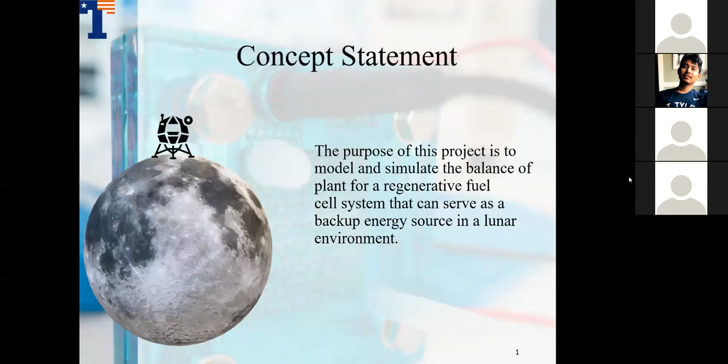NASA has continuously looked for ways to develop an effective power generation system that can provide sustainable energy to meet its challenging environmental conditions in lunar space. One device that NASA has implemented is the fuel cell. Unlike batteries, which run out over usage, a fuel cell produces clean, hazard-free, constant power. It produces electricity through an electrochemical process between hydrogen fuel and oxygen to produce water and heat as a byproduct.

Theoretically, the efficiency of the fuel cell is 83%, while the power needed for one lunar cycle is 100 watts. The design is a self-contained unit that can be transported to the lunar space, where it can be powered on by a photovoltaic cell during lunar day. Since the project is meant for lunar exploration, our design was modeled under Earth-based conditions. By doing this, we were able to replicate the design by using simulation to show performance of the whole system through the in-lab testing of the anode side to generate a power of 100 watts. Next.

This animation shows how hydrogen flows into the fuel cell through the anode side and oxygen through the cathode side. The hydrogen ions flow across the membrane towards the cathode, while the electrons flow through an external circuit, do work, and return back into the fuel cell. The oxygen from the cathode recombines with the incoming electrons and hydrogen ions to produce water and heat as a byproduct. Next.

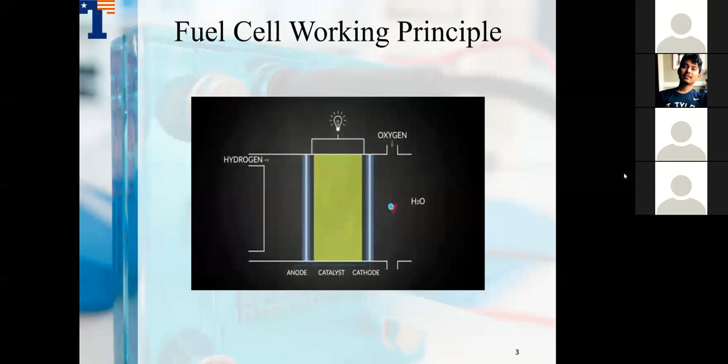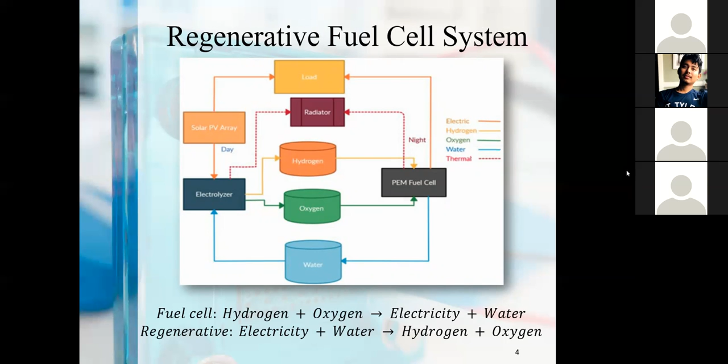It is regenerative because the electricity produced uses water from the fuel cell to produce oxygen and hydrogen by way of the electrolyzer, which is then recycled back into the fuel cell for continuous flow of power. Next. Here are our project objectives.

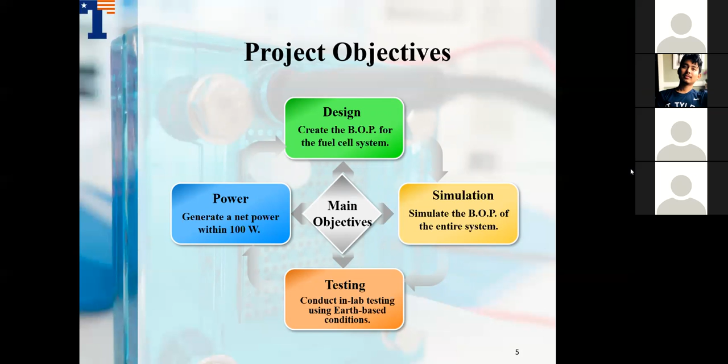Last semester, we focused on design, which is to create the balance of plant for the fuel cell system. This semester, we focus on the simulation and testing. Simulation of the operation of the balance of plant to see the relationship between various components. And the testing, to build and test an anode side using Earth-based conditions to give a physical representation of the system. And the last objective is the power, to deliver a net power within 100 watts, as the value was set forth as a requirement for the project.

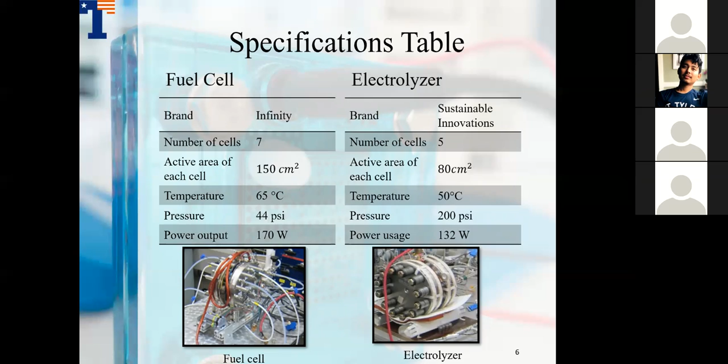Here we have the specification table. The simulation models were using the fuel cell and the electrolyzer from these two brands, which are Infinity and Sustainable Innovations. For the fuel cell, it had 7 cells with an active area of 150 centimeters square. For the electrolyzer, the number of cells was 5 with an active area of 80 centimeters square. Simulation enables experimentation on a valid digital representation of a system. The simulations are key to see if the values are reasonable and acceptable for the project.

This is our Simulink design schematic. At number 1 is a PEM fuel cell, which will convert the chemical energy of hydrogen and oxygen into electricity through chemical reaction. Number 2 shows the electrolyzer, which breaks down water into hydrogen and oxygen. Number 3 shows the hydrogen and oxygen entering the fuel cell through the anode side and cathode side respectively. And number 4 is a water storage tank, which holds the fuel cell byproduct, which is water.

And for the thermal fluid management, we have a cooling line, which will use DI water, heat exchangers, and dehumidifiers. And there's also supporting components such as pumps and compressors. The Simulink modeling and simulation the team conducted will focus mainly on the fuel cell, electrolyzer, storage tanks, pumps, and compressors. Next.

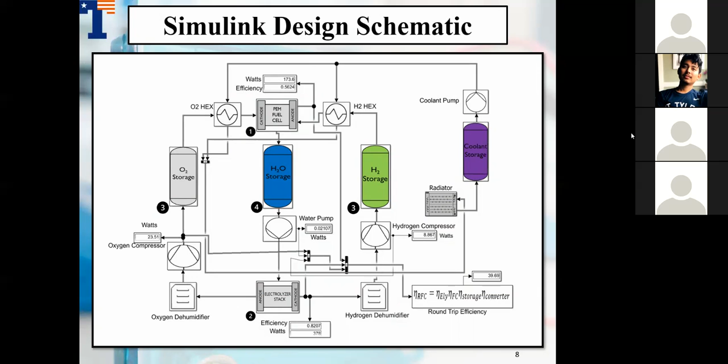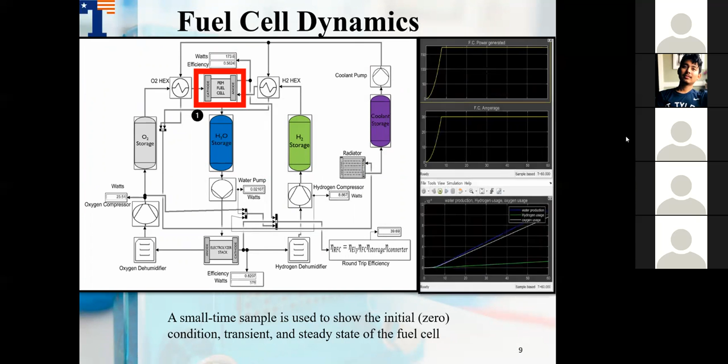Our model was based on a 24-hour cycle with the fuel cell operating for the first 12 hours. A small time sample is simulated to show the zero initial condition, transient, and steady state of the fuel cell. The fuel cell subsystem was modeled with the current being the input and the mass flow rates of the gases and water being the outputs. Next.

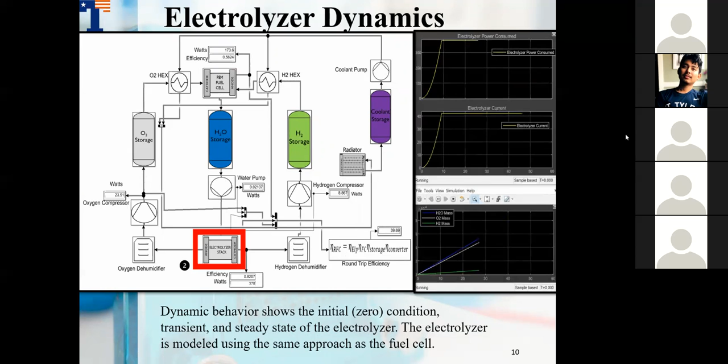For the last 12 hours of the 24-hour cycle, the electrolyzer is in use. The small time sample shows the dynamic behavior of the electrolyzer from its zero initial condition, transient, and steady state. Much like the fuel cell, the electrolyzer was also modeled using the current as the input and the mass flow rates of the water and gases being the output. However, since the fuel cell consisted of 7 cells and the electrolyzer of 5 cells, the electrolyzer had to be adjusted to match the mass flow rates of the fuel cell, which we use for our BOP components. Next.

The H2 and O2 storage tanks were simulated for a complete 24 hours. They were modeled using the ideal gas law. For the first 12 hours, the pressure and moles of the gases are depleting. This is due to the fuel cell using the gas as fuel in the chemical reaction that produces a power output. For the last 12 hours, the pressure and moles of the gases are increasing. This is because the electrolyzer is in use. This time period is also known as the recharging phase. Next.

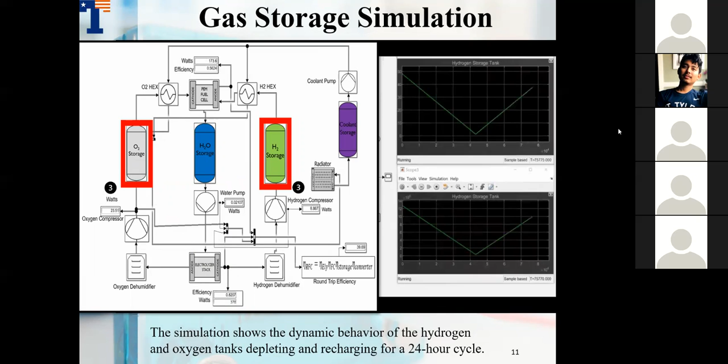For the water storage tank dynamics, the opposite behavior is observed in comparison to the gas tanks. A positive slope is observed for the first 12 hours because the water is being produced as a product of the chemical reaction taking place in the fuel cell. The electrolyzer then uses the water for the last 12 hours to break down hydrogen and oxygen back into their gas states. Next.

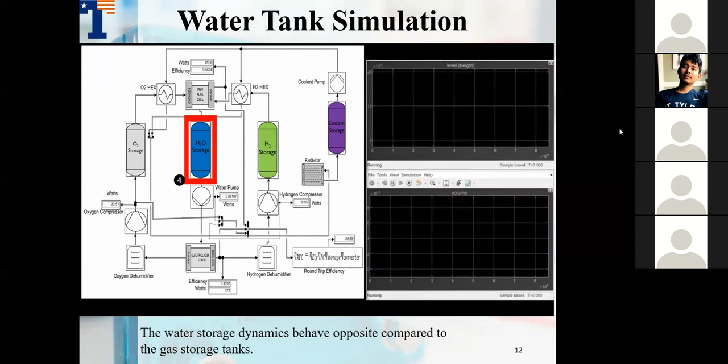The results show that both temperature and pressure influence the fuel cell's efficiency, which also affected the round-trip efficiency of the RFC system. 3 cases were simulated where only the fuel cell's operating conditions differentiated and the data recorded. Next.

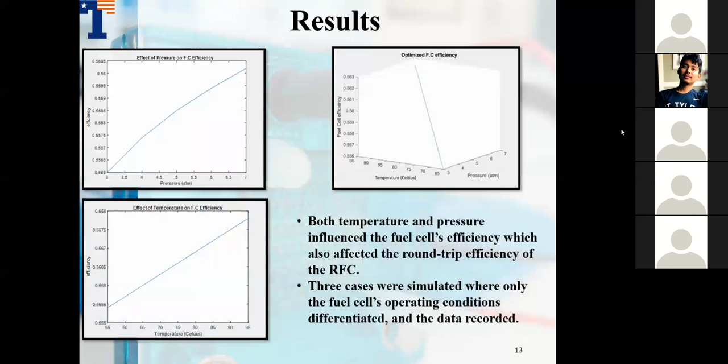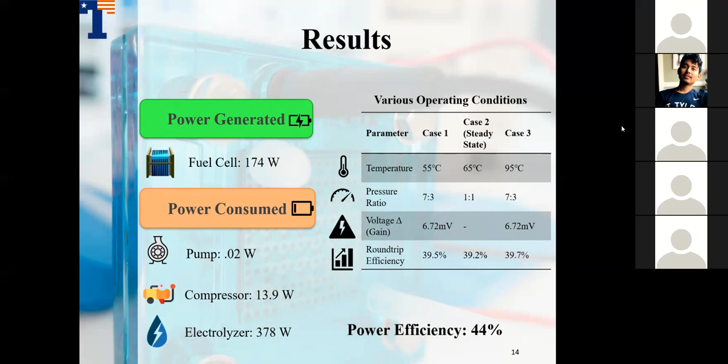For the 3 cases, the temperatures were changed and the pressure ratios were also changed, which yielded 3 different round-trip efficiencies. The fuel cell generated 174 watts. The pump consumed 0.02 watts. The compressors consumed 13 watts. And the electrolyzer consumed 378 watts, which was provided by the solar panels. In terms of power in and power out, the power efficiency was 44%.

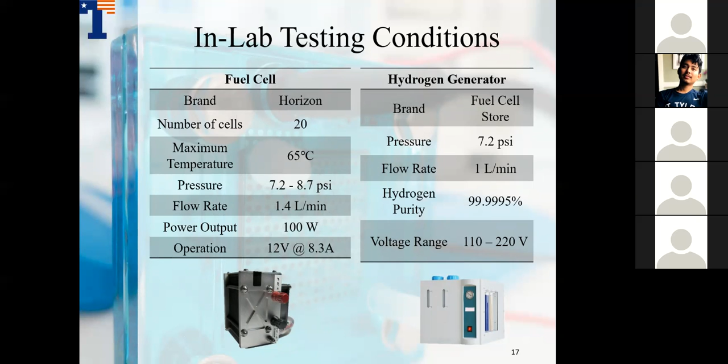The figure shows the electrical diagram of the tested system. An Arduino microcontroller was used to control the blower and the valves, whereas an NI USB data acquisition device was used to measure and record the flow rate, pressure, and temperature of the hydrogen supplied to the fuel cell. Next. Data was collected and recorded using LabVIEW. The figure shows the front panel of the testing, which includes the control for the blower and valves and the measurement of temperature, pressure, flow rate, voltage, current, and power. Next.

Here is a video which shows a quick demo of the experiment. The generator is producing hydrogen at the given flow rate, which passes through the flow meter that will adjust the flow and pressure going to the fuel cell. The output voltage and current from this fuel cell will be measured using the NI DC electronic load and in the LabVIEW front panel.

The factors that affected the testing results were pressure, flow rate, temperature, and the time of operation. The optimal performance was obtained at 8 psig, 1.023 standard liters per minute and 23 degrees centigrade, which was around 80 watts, operating at 14.5 volts and 5.5 amps. Next. One of the future improvements the team had was to maintain a steady flow rate. The optimal performance was rated at 1.4 standard liters per minute. However, the flow rate was capped at 1 SLPM by the flow meter specifications.

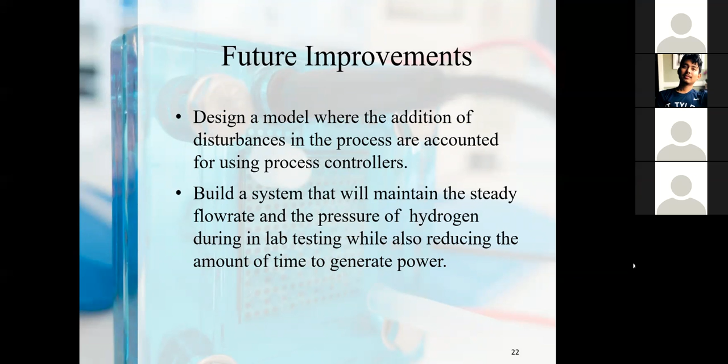Next. In conclusion, theoretical analysis and calculations were performed to confirm the effectiveness of the design. Simulink was used to model and simulate the BOP under lunar conditions. Then, anode-side testing was conducted using Earth-based conditions. This is important to see how a system similar to our design schematic would do in a real-world scenario. The pressure and flow rate had the greatest influence on both the simulated and in-lab testing results. By completing this project, the team could understand the importance of a balance of plant and how it affects the efficiency of a system. Next.